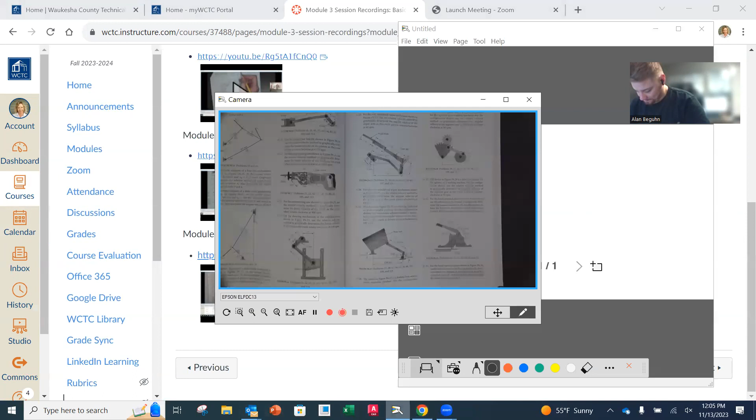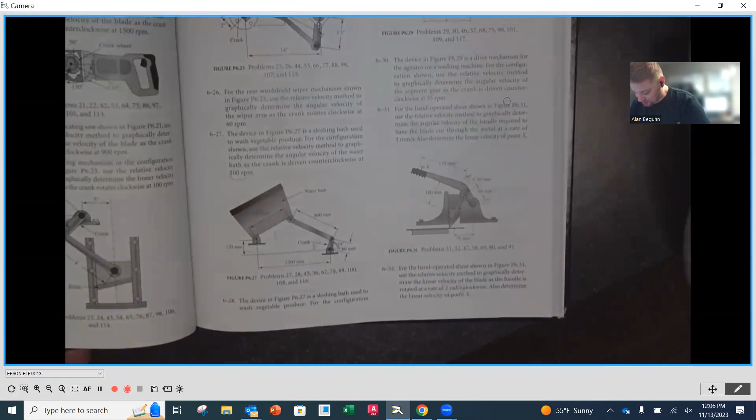Probably the first place, if you do need to look back and remind yourselves, this would be the best place to start, is looking at the videos. Otherwise, I can always answer questions. So the question is on the points of interest, or the points on a floating link. Let me go back to the end of chapter 6. I'm going to go underneath here, make this big, and that's going to be these two. So 31 and 32 are the problems that go along with that. What question do you have?

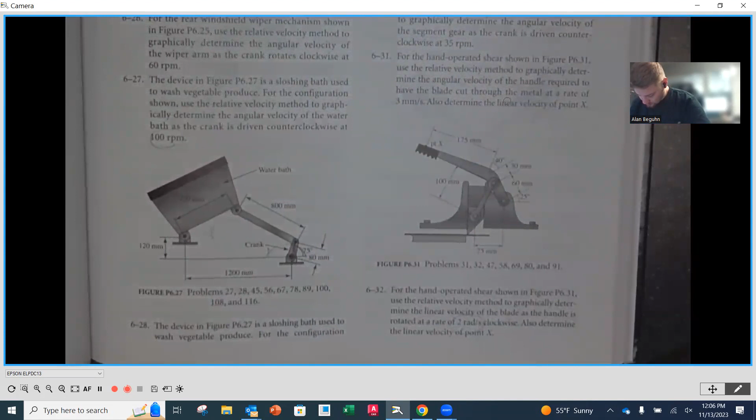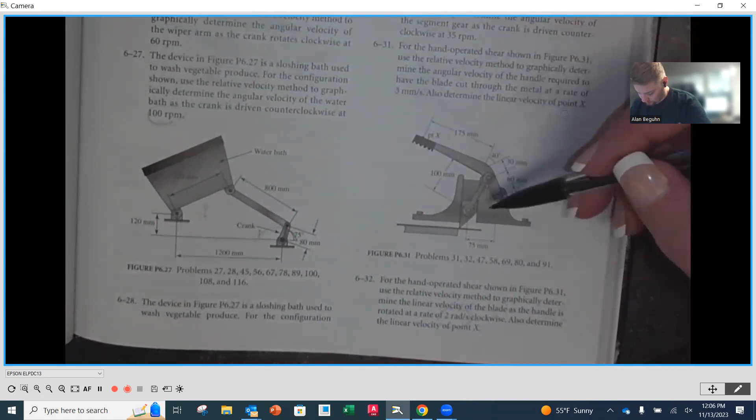I just don't know how to go about figuring out what to do next. So you want to know what the linear velocity is of point X, right? That would be like the very last step that you take. You'll notice that point X is on link number 2. So for instance, on number 31 here, you have to find W2, and I believe we did this step by step in our lecture when we were together. So then going backwards, your W2 you will know. You will need to construct, in AutoCAD, the radius that goes straight back.

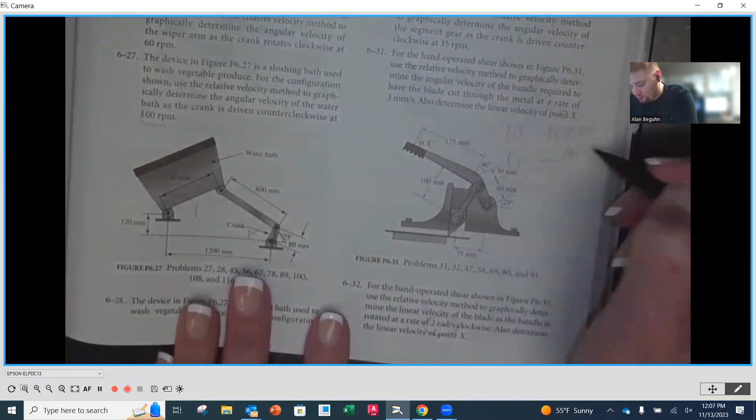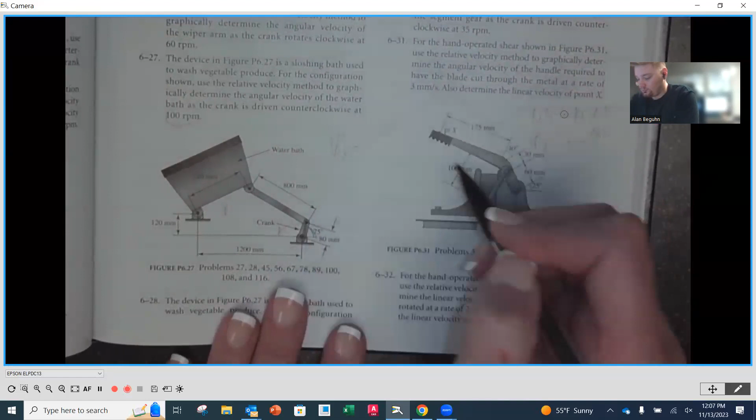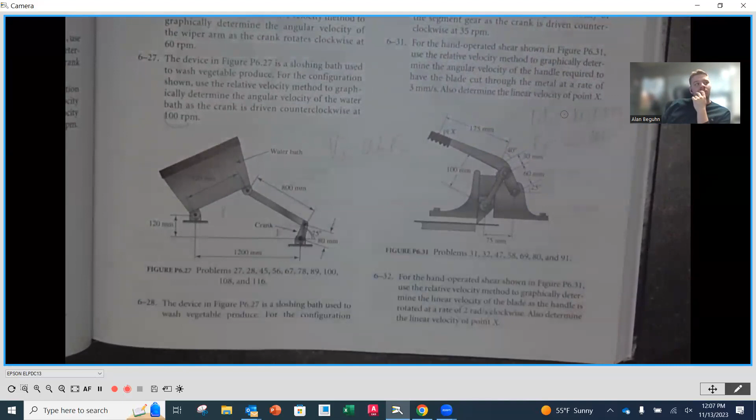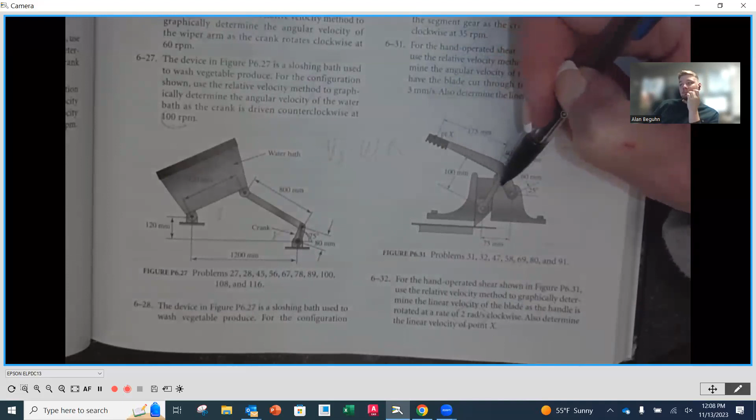So don't use the 175 and then 2 and then the 30 plus the 60 back to this point of rotation. You need to draw a straight line to that point and then measure its distance for its radius, so you're going to have a radius X from CAD. Once you have that, then you use that to find your velocity of X. Velocity of X is equal to W2 times RX. Make sure that your W2 is in radians per second so that you can get it there. I remember doing that in our demonstration, towards the end of the assignment 3 demos that we would have done the last time we were together, just so you know if you wanted to reference that. But this should kind of help along. Does that make sense? And the key for X really is making sure that you construct that line that goes straight back to the center of rotation, and then measure that directly from CAD.

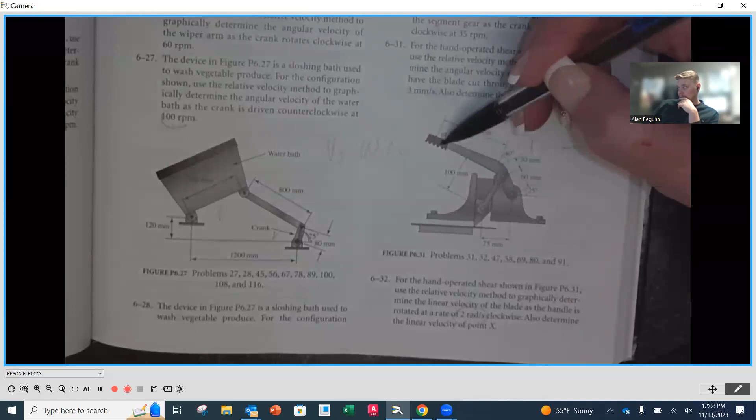Okay, yeah, I got the radius part, I just didn't know if I could simply just do a radius. Yeah, yep, that's okay, that's all right. So that would be that dimension right there to plug in, and then just make sure W2 you would have - and I think I actually remember mentioning this - when you solve for W2 here, your first units are going to be radians per second. So you don't have to go through that business of going from RPMs to radians per second, because in the previous step you'll have it in radians per second to just plug right in here. Any other questions on assignment number 3?